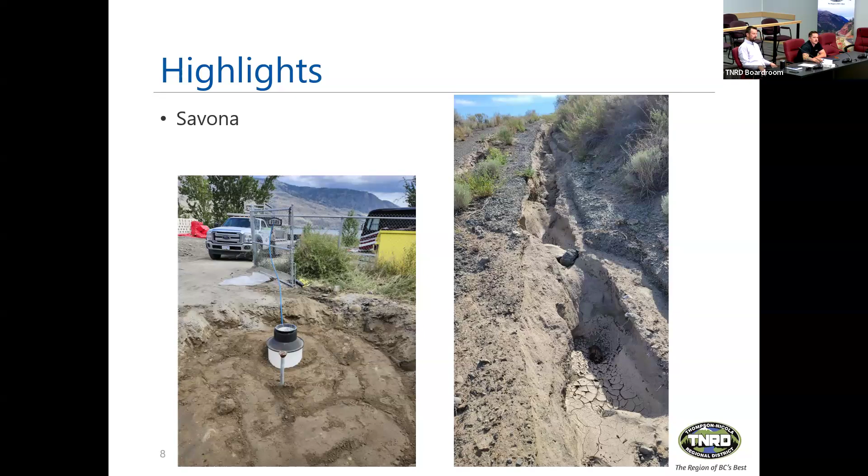Moving on to Loon Lake. Like we talked about, Al's out there, I've met him a few times. We swapped a chlorine pump, a new one off the shelf for him. We talked about reservoir cleaning yesterday - it's kind of a manpower thing right now, maybe get to that down the line.

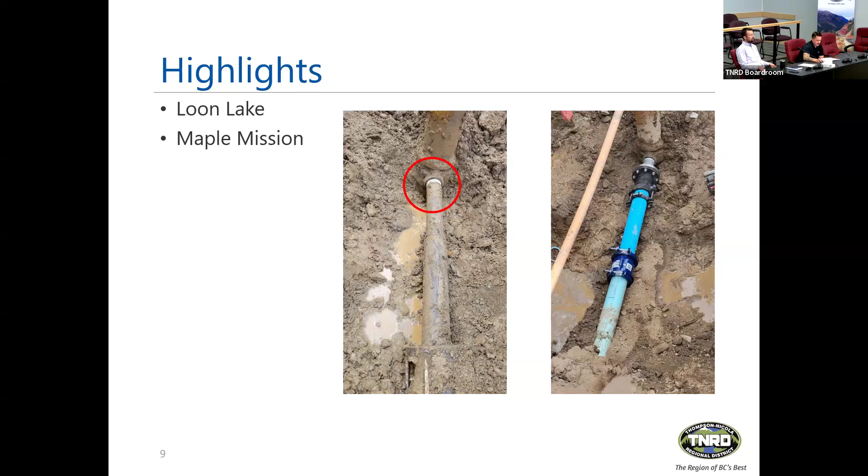Spences Bridge - mid-July we had a bit of an issue. We noticed our reservoir levels were dropping, and overnight the reservoirs weren't recuperating or filling as much as we'd have liked, so we were losing ground. We sent out a water conservation notice to the community to stop watering and save as much water as we could. We went out there, did some door-to-door PR work and handed out flyers letting everybody know what was going on.

That seemed to help - the water levels came back. We found a few more leaks that we had to go around and find, some hoses and some water draining that we had to turn off to help with that.

We managed to pinpoint our issues to the well level sensors at the pump house. We did some switching around of the well level sensors and realized one wasn't reading properly. We got the proper level sensor in there, and a couple days later sent our engineering crew to install new level sensors throughout the system. Everything came back to normal and we managed to take the conservation notice off and just put our regular watering restrictions in place. It was a few days of troubleshooting and figuring things out, but it worked out well.

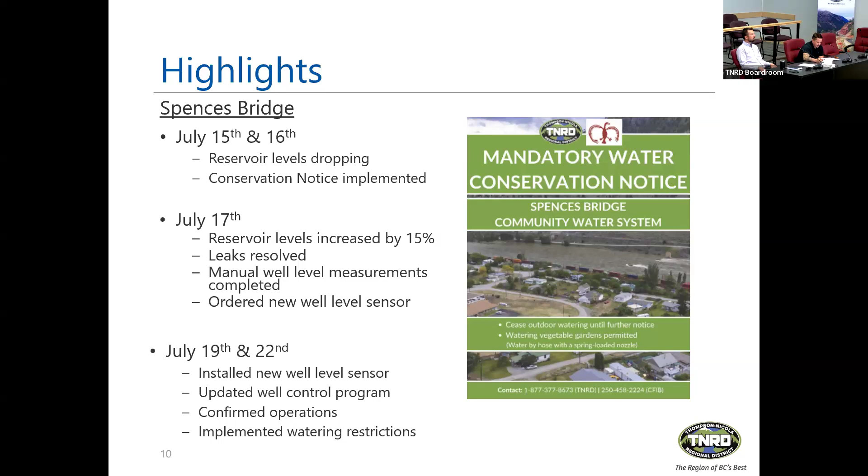Vavenby, Walhachin and Pritchard are all standard - not much going on there. Chlorine pump rebuild in Walhachin, the filters are fine, but nothing really to report for those communities.

Wastewater side of things - Paul Lake is in good order, no issues there. We just finished our sludge pumping campaign for the... septic tanks, sorry.

Weather dependent and resource dependent. There's been lots of power outages up at Paul Lake. They've been doing a lot of power pole work and stuff along the main road. Our generator's been fine - everything's been running normal when any issues like that have occurred.

We had to do a confined space entry. I had to go in there and wrench on some valves and get things moving, and we managed to fix that, but then that caused an issue at the actual treatment plant. So we had to bring a hydrovac truck and try to get some rocks out of some lines, and there seems to be a bit of an issue of rock, dirt and debris getting into that system. But it's running fine now.

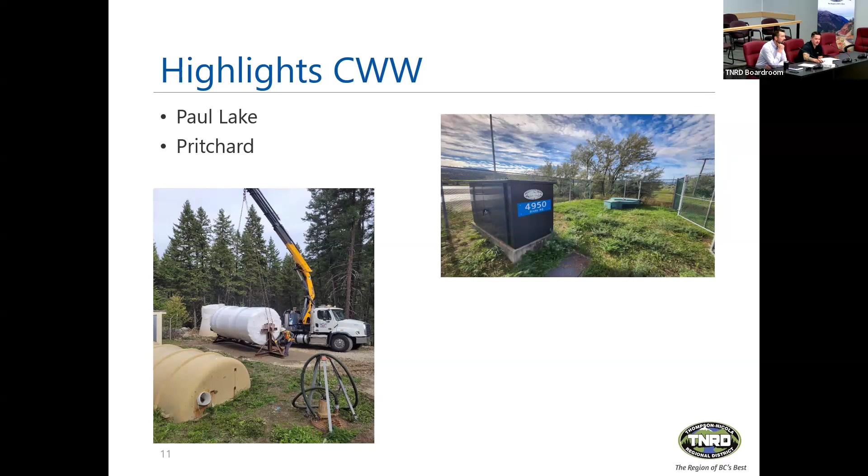General summertime mowing and upkeep throughout Pritchard, and this winter we're going to be doing a UV system cleaning. That's it for now. What's next coming up?

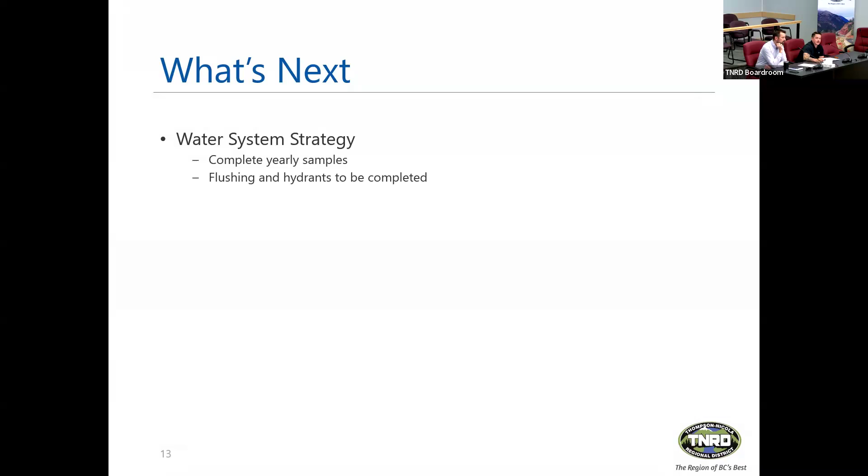We have to complete our yearly samples as normal, just keep that operation going. Hydrant flushing in the falls to kind of clear the lines up. As I mentioned, we have analyzers to install throughout the system, so we're going to have a standard analyzer for everybody. It will be nice.

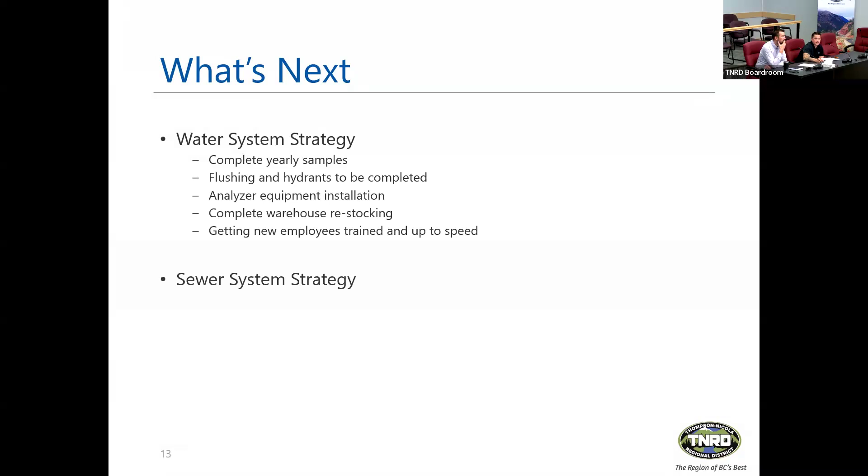Warehouse restocking and just getting our new employees trained and up to speed so we can get that full crew going. Sewer system, want to do a little bit of a clean out. Like I mentioned, there's a lot of rock and debris in that system, so we're going to do a clean of the lift station and some of the lines.

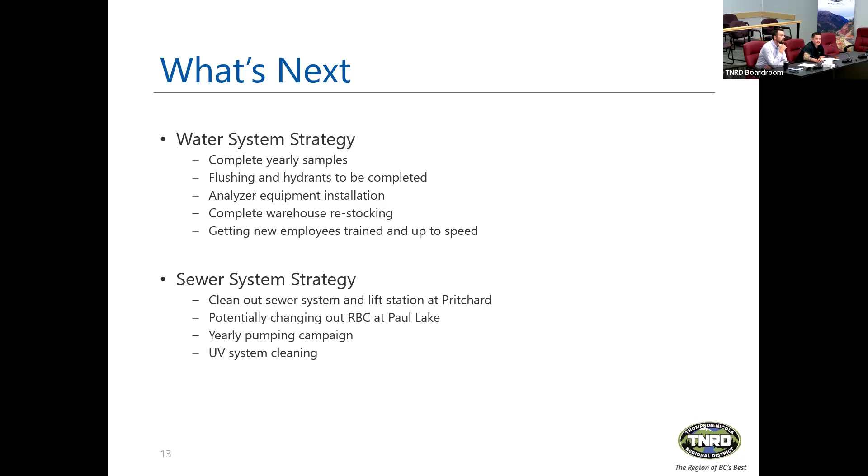Changing out the RBC as we mentioned as well. Yearly pumping campaign is completed, and our UV system cleaning coming up. That's all we got for now. Questions?

Okay, I see a few questions. We have Director Grenier, Sao, and Houghton. So we'll start with Director Grenier.

Thank you, Chair. On the Savona system flood event, my recollection was that there was a fund available to the TNRD to repair things that happened in that flood event. I'm just wondering, when the picture of the road came up and anything else that was going on, whether we've made application to recover some of those costs, if that's something we can apply for.

The Reservoir Road and that work was completed under an EAF through the EOC, the Emergency Operations Center, as well as inspecting the potentially impacted water meter pits. There was also a contractor hired through the EOC to complete all that work as well, so.

I can clarify that. So the answer is yes, that was provincially funded. So it's through, when we do action through the Emergency Operations Center, we submit what's called an EAF, expense authorization form, which means we can do emergency works and then we bill all of that work back to the province under the emergency program. So all those repairs and work happened under that emergency.

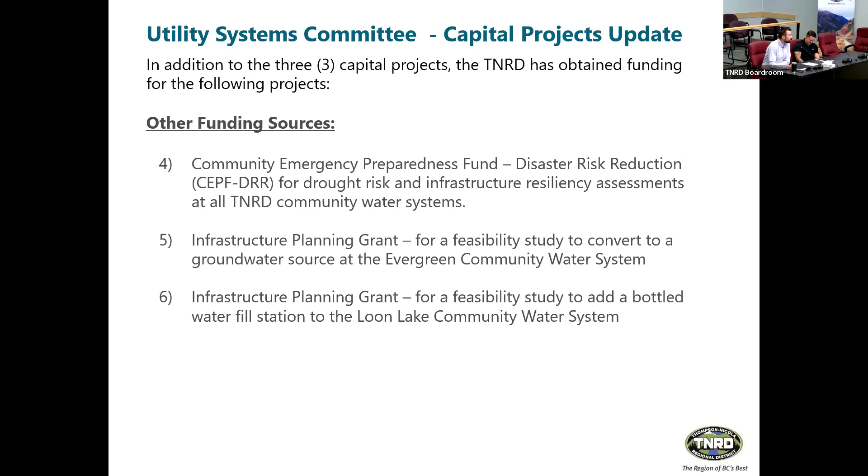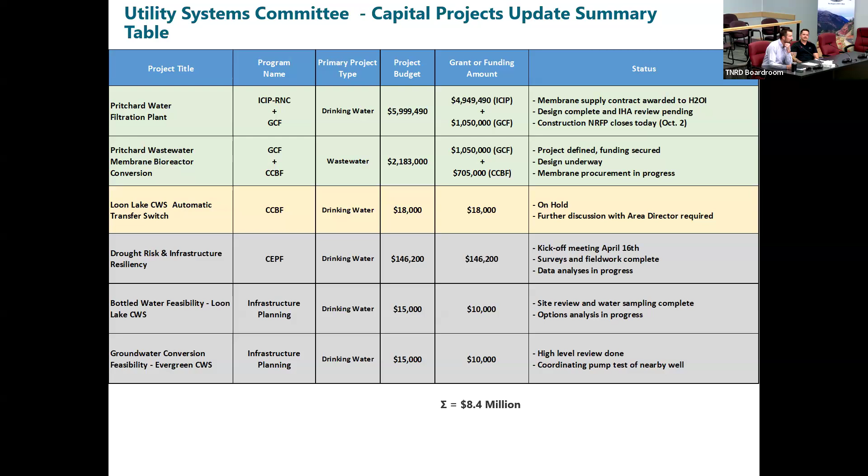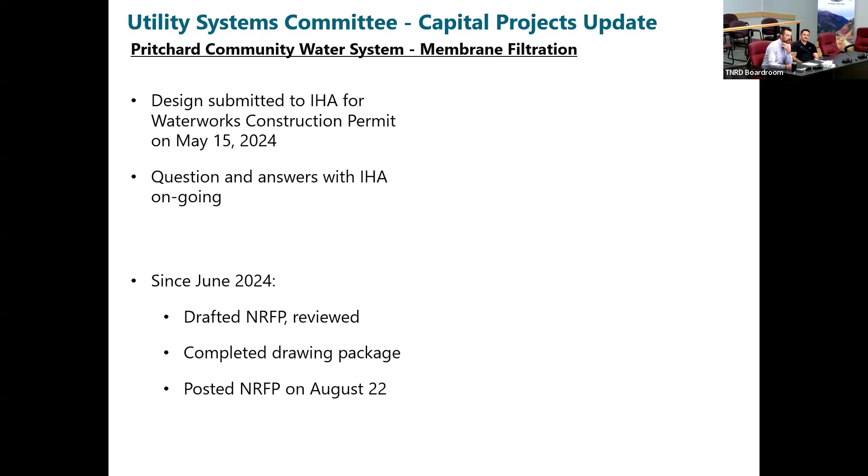Starting off with our membrane filtration plant in Pritchard, design is complete, submitted to IHA for the construction permit, and there's question and answers with IHA ongoing to finalize that construction permit. Since our last meeting in June, we have reviewed the drafted NRFP, or negotiated request for proposal, and the drawing package has been completed along with the NRFP. This is our procurement process, essentially what you'd normally hear as a tender. We're doing a slightly different process, but the tender was posted on August 22nd and closes today, so we'll have some news for you guys next meeting. Fingers crossed, especially from the guy behind me.

Who we'll introduce a little later. Yeah, so this went up on the, yes.

We just have a question from Director Grenier: how many bidders did you have on that project? We do not know yet, it closes today. At the end of day today, it closed at 2 p.m.

How many packages got sent out? I don't know. So for this, the point of contact was True Consulting. They stick-handled the whole process for us. So when I say we drafted the NRFP, I did not draft the NRFP.

I reviewed it, Jamie and I reviewed it, and I did not complete a drawing package. That was our consultant. The consultant posted the NRFP and is dealing with the addenda and answering questions that come in from bidders or potential bidders. They will also provide a recommendation once all the responses come in.

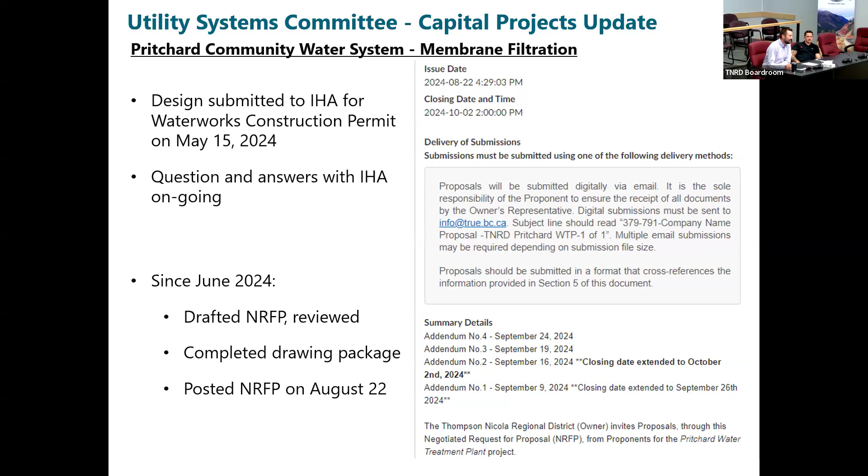So that's kind of where we're at. That's why I say these are not super exciting. It's a big ticket item, but since June, what do we do? We posted a tender and are waiting for it to close. Not super exciting stuff, but it's getting there, one step further along.

Our Pritchard Community Sewer System - again my formatting is odd here, but we have a $2.15 million budget back from July 2023. The design is partially complete. When I say partially, I mean we require our technology selection - which membrane vendor to go with - to finalize the design so our consultant can work that system into it.

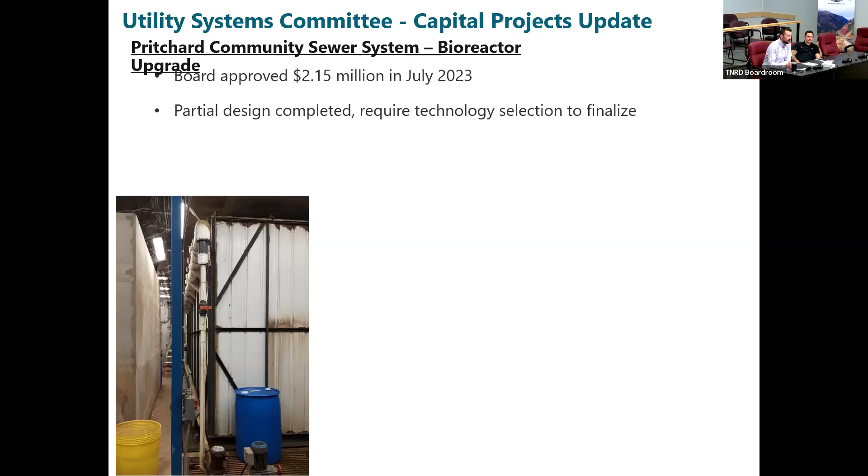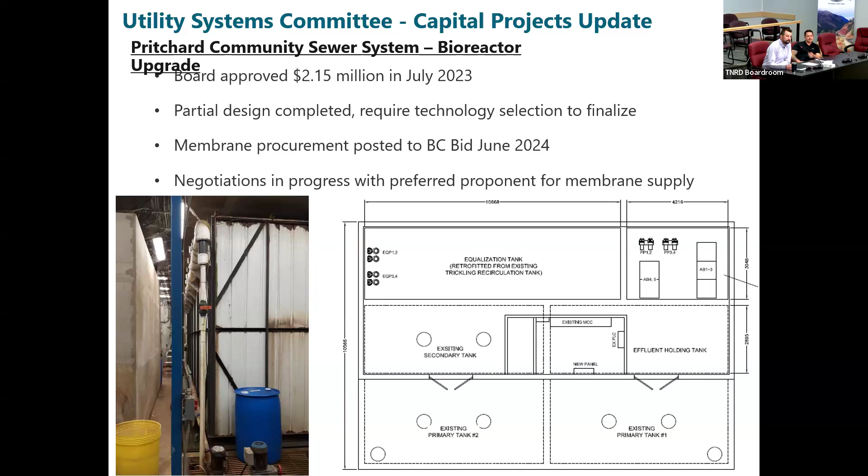Membrane procurement was posted back in June 2024, around the same time as our last meeting. We're currently in negotiations with the preferred proponent for the supply of this. This is again another negotiated piece where we had some responses and narrowed it down to a couple, and are negotiating with the top choice to make sure we check all the boxes. So that's where that one's at.

Loon Lake: the board approved $18,000 in CCBF for an automatic transfer switch in Loon Lake. That was a few months after we had the funding approved for all the other utility systems, which have been completed. So for this one, the timing was terrible - we got into procurement delays through COVID where the transfer switches we purchased for our other utilities were 6 weeks away, but for Loon Lake we were looking at 6 to 18 months, pretty lengthy times.

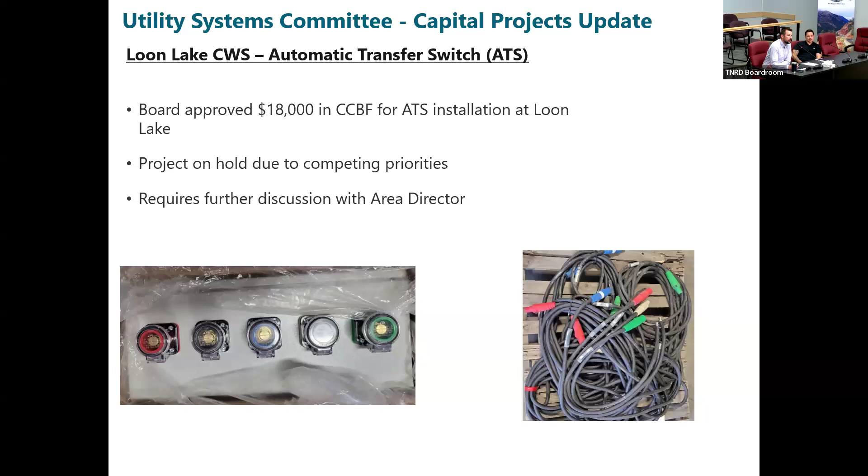In the meantime, we put it on hold and are looking at other options. We have this planning grant now for a bottled water fill station, which I'll talk about in a couple moments. Basically we're thinking this project is on hold and we need further discussions with the area director for this and what we'd like to do up there. So I'm just going to throw that out there for you.

Well, the area director just put it on hold? No, sorry, it's not the area director that put it on hold. Staff's recommending we put it on hold and have further discussions with our area director to see if there's better use of that funding. I have my moments.

All right, we have our CEPF grant - this is our drought resiliency, drought risk and infrastructure resiliency. I don't know who named this stuff, but we're basically looking at the potential impacts of drought on our water system. All the required field work is complete and initial groundwater system analysis has been completed.

The surface water hydrological analysis has been completed and the preliminary results show that basically our earlier snow melts are shifting and resulting in our low water periods shifting, resulting in slightly higher surface water levels. So we're not getting these larger dips - the South Thompson isn't going as low because the snow is melting earlier, so it's pushing that low point back, which is actually at a higher level on the scale, if you can think of it that way.

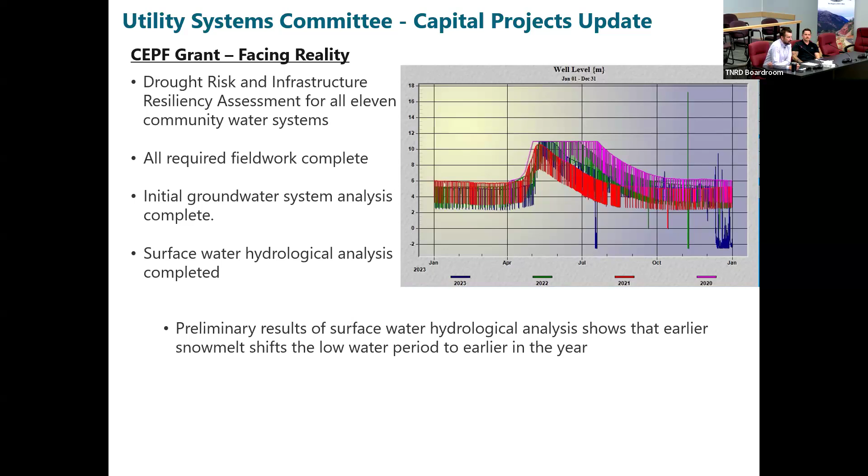So climate change is driving these earlier snow melts, and this is preliminary results right now. We'll have a full report on this a little later.

The next steps are to work with our consultant to review the operational challenges that Quinn, I, and our staff are experiencing, review the summer and fall water levels and the predictions, as well as look at our water licensing. Once they figure out what's going on with our groundwater levels, our supply, and our surface water availability, we need to look at how much water we are using, how much we require, and how much we're licensed for. This is going to look at all the risks we have, and I'm expecting to generate a few more capital projects out of this, identifying some more risks we should probably address.

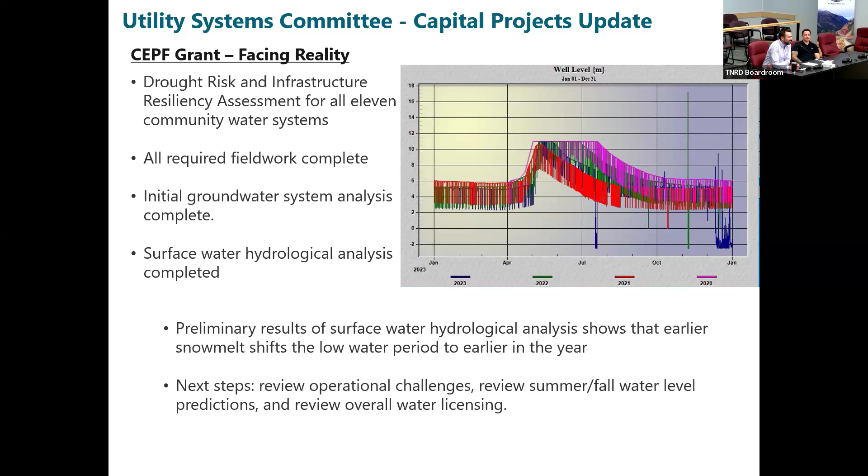Preparing for the future, the planning grants - these were in the future section a few meetings ago. They are in the current section now.

This is Evergreen, our smallest water system with 16 users. We have access issues to our intake. Our intake is on the lower right-hand side of the screen, on the bank of the North Thompson, and has a railway and a highway between it and our community water system, as well as a parcel of private property that's not within our community water system and not connected. So it has some access issues.

So we're looking at converting to groundwater. I had to rotate this map, but in this area here there's a groundwater well. We spoke with another resident who has a parcel over here where there may be potential groundwater. The high-level work's been done, but there's an old valley canyon that runs through here and another one that runs through this area, keeping this piece here. There's groundwater here and potential groundwater here. We're basically at a high level right now of where to predict any groundwater would be.

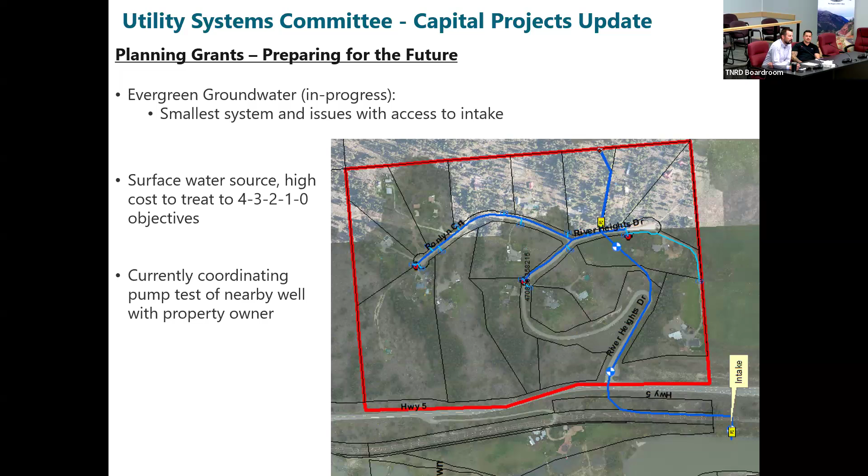Loon Lake Water Filling Station - this is in progress. We completed a site visit up there, took some water samples, and did some analyses on those. Essentially what we found is that we will need dedicated iron and manganese removal, something like a green sand filter to remove the iron and manganese from the water.

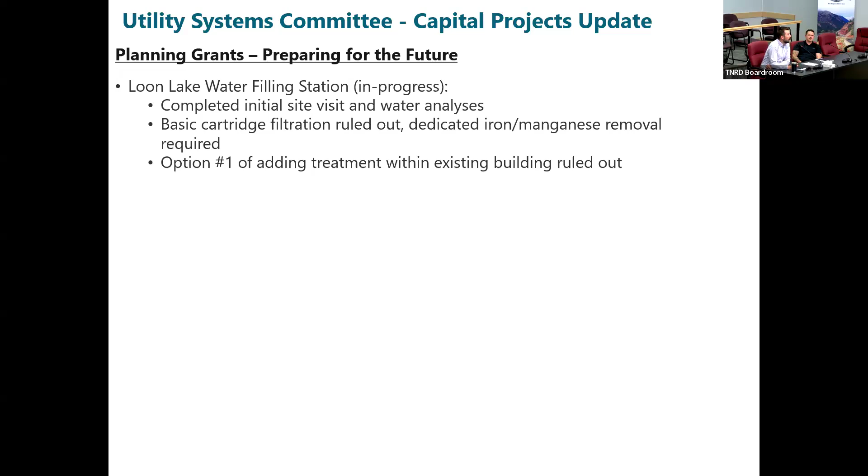It's dissolved with the chlorine that's injected, which doesn't provide enough time to precipitate it before we could deal with it in the existing building. So option one of adding our treatment within the existing building has been ruled out.

This is what our feasibility or planning grant is going to propose: we have our intake in the center here, and that building - we're not going to be able to shoehorn an effective treatment system into it. There's a TNRD parcel here that has 2 water mains along it and is right across the street from our existing intake, where we could potentially put a small building and treatment process for the bottled water fill station, providing some synergies with other departments' potential projects as well.

So that's where the Loon Lake project is at, and this is why we'd also like to put that automatic transfer switch on hold, because a separate building may require different power requirements, possibly 2 hydro services - things like that. We don't want to spend $20,000 or $15,000 on a transfer switch that will be great for 6 months and then obsolete after that, when we haven't in 6 years had to put a generator in Loon Lake to keep the system up and running. So those are the kind of discussions we want to have a little bit later about this.

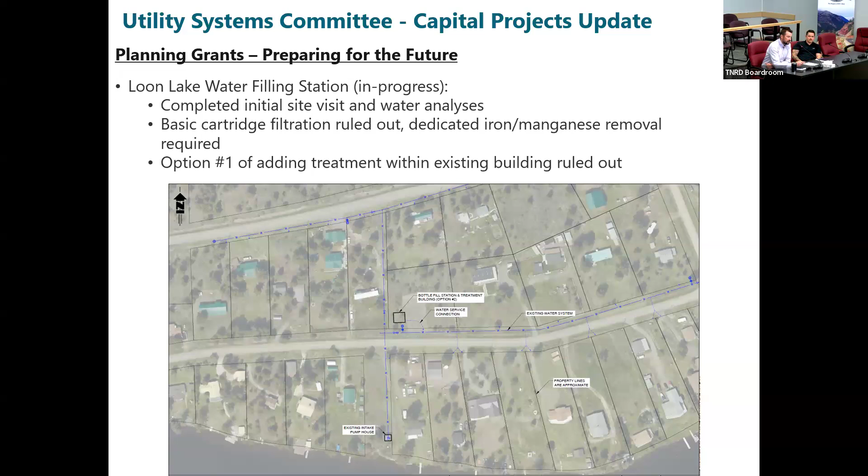So future projects - one right now, there's lots more, but the one on the books right now is the Walhachin Reservoir. We completed an options assessment last year and decided that storing treated water versus raw water will eliminate some hazards.

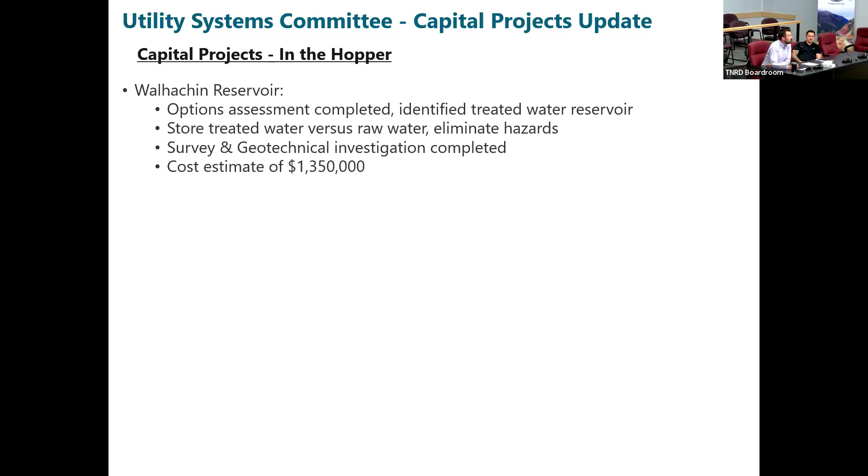We've identified a location for this. This is our current building, where the water comes down from the reservoir and gets treated through this little building here. This site is also TNRD property and has a small garage on it, with 2 parcels here.

So this is a site we've identified, not necessarily right on it, but on this parcel where we've identified to put a reservoir. The water will come from the pump station and current raw water reservoir, get treated through the existing treatment building, and be stored in a treated water reservoir on the parcel adjacent to our treatment building.

Obviously a reservoir at the same grade as the users won't provide the pressure, so there will be a booster skid in there, very similar to the Evergreen booster skid that we have.

Very reliable and will provide adequate water supply and pressure to the community. There's a question from Director Grenier: how many users are on this system? Walhachin has around 40 as well.

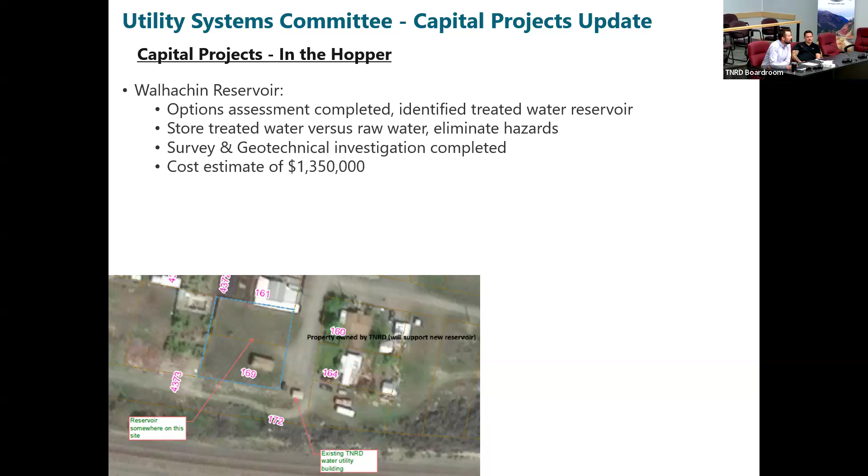So this is what the current area looks like. You can see the fire truck beside the garage, and the two buildings at the end of Barclay Street are the old chlorination building and the newer filtration building. We've done the survey and geotech investigation on that parcel where the fire truck and garage are.

We have a revised cost estimate in our capital plan from the capital budget from last year. We were looking at 1.19 million, but the revised estimate is about 1.35 million to do this reservoir.

To fund this, we would be looking at splitting it 50-50 between the Growing Communities Fund and the Community Works Fund, or Canada Community Building Fund, CCBF. Basically our Growing Communities and gas tax funding there.

We anticipate taking a report to the board, not tomorrow's meeting but the one after, with this funding request. For the Growing Communities Fund, there was a report to the board back in June 2023 laying out just over $5 million provided to the TNRD for the Growing Communities Fund, and staff would identify eligible projects. The Walhachin Reservoir was in that report as one of the potential projects, as well as other departments' projects. So we would be bringing a report for accessing that funding for this.

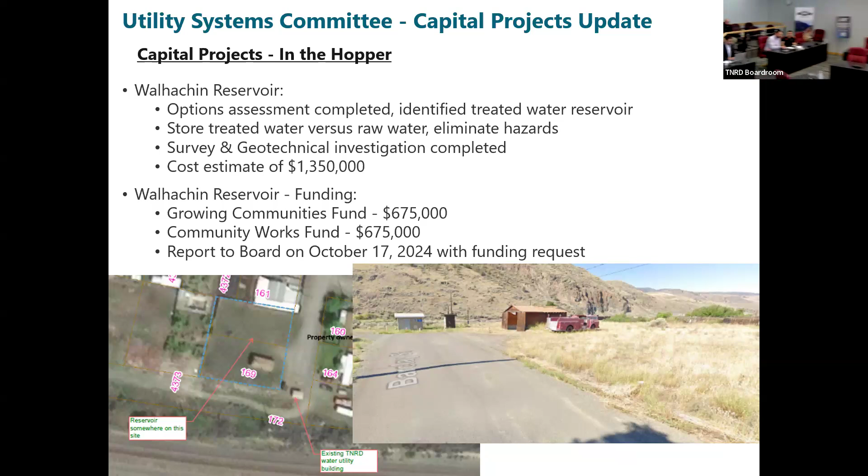I mentioned multiple times the Blue River water main replacement. We have $200,000 funded through reserves, specifically the Blue River Community Water System Reserve, not any other water system reserve or general reserves. So when you see reserve funding mechanism here, it's from that Community Water Systems Reserve, funded by the parcel tax and user fees from that community water system. We also have multiple CWS reserves and CCBF for disinfection and water quality analyzers. Those are the items Quinn mentioned before about standardizing our analyzers throughout our utilities, as well as our dosing, sodium hypochlorite or chlorine dosing pump skids. Those are already funded and in the works.

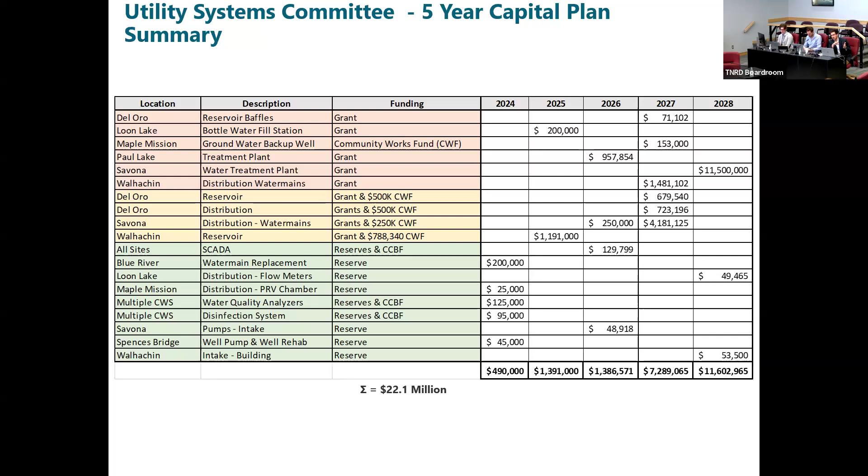Okay, I see Director Sau. Thank you, Chair. To Mr. Vieira, I understand we already discussed this over email, but with the new information you were sharing, I just wanted to see if I have my understanding correctly.

So if these items will have basically a staff time priority, not necessarily funding, but at least they're ratified by the board to say these are priorities. So if I see a system or a project within my area that's not on there, would I be correct in understanding that it's a lesser priority in terms of staff time than, for example, the Vavenby water treatment? Thank you.

So, the Vavenby water treatment facility, the preliminary design is complete. It's a shelf-ready project. It's not on here yet. I think it's further on, we forecasted it further down the road. We put together the 10-year plan and then take the 5-year snapshot. This is just a summary I pulled from the 5 years of the 10-year, so it's like an excerpt of an excerpt. Just for some high-level highlights, but Vavenby would be on there further down the road.

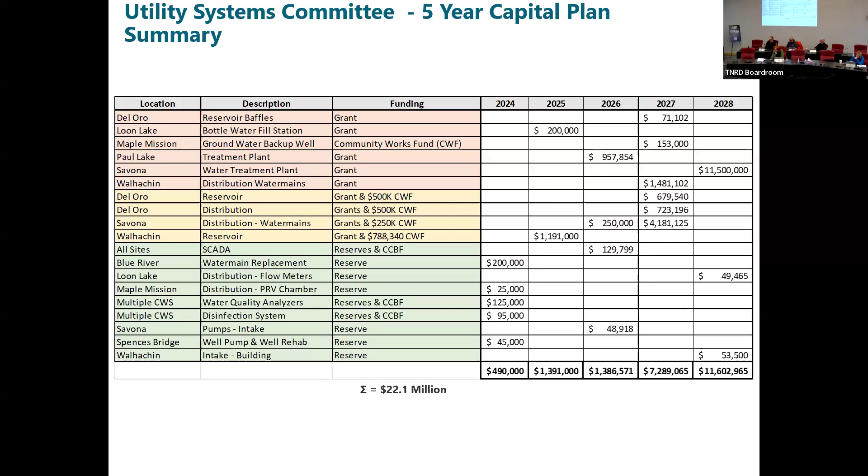That one's identified to be replaced as part of our capital planning and asset renewals. These things are near the end of their life, so let's replace them and rehab that well while we pull the pump out of the hole. That's what the 5-year and 10-year plan had, normal routine asset renewal replacement, not an emergency one. In July, the thought was we could do a short notice rehab on that well if needed since we already had approved funding, but we didn't need to. Okay, thank you, just trying to clarify.

Okay, Tyrone, do you have anything else? That's it, just a blank screen. Okay, so we'll move on to item 5.3, small water system treatment.

All right, thank you, Chair. So we've been kind of foreshadowing the guy sitting behind us, so I'll formally introduce him. Liam, you can join us at the table if you want. This is Liam Baker, our lead engineer with True Consulting, who has been working with us for quite a few years on many of our projects. I've invited him here to give us a refresher on small water system treatment.

We geek out on these meetings talking about all the different water systems and what we're doing for capital upgrades, operational costs, and operational treatments. We're also talking about grant funding for new projects we want to see happen, like the water treatment plant on track here in Pritchard, and many others on our wish list. I want him to talk about what really goes into these projects in terms of planning, budgeting, and engineering, because there's more than just the ticket cost of the guts of a water treatment plant. That's just a small component. We have engineering costs, land acquisitions, all part of the process.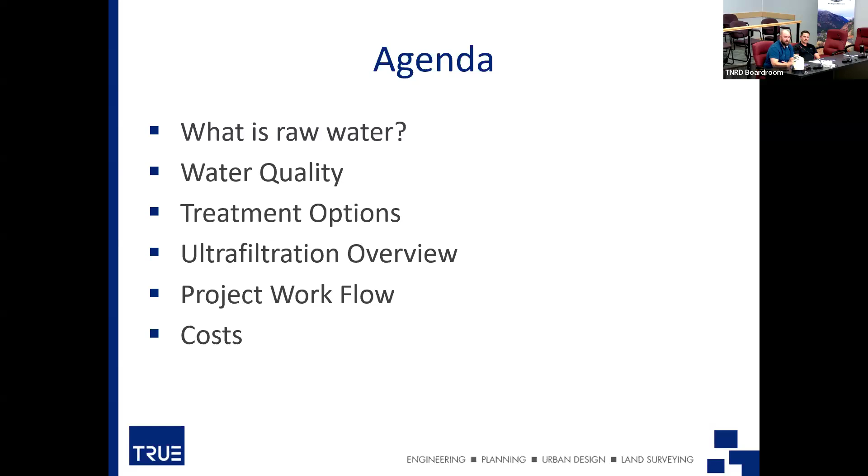And then finally, we'll talk about costs. We struggle with the costs probably just as much as this group might and other municipalities might. It's a difficult battle, and we can talk a little bit about where the costs come from, what parts of the infrastructure result in what kind of costs for the upgrades, and then also some of the inflationary difficulties that we've had in recent times. Obviously happy to answer questions - I've structured it to hold questions till the end, but always happy to have a discussion.

So yeah, raw water, this is usually where you start, right? You're looking at what water is available to any given community. I believe everyone in this room has a water system in their area. Usually you start by trying to find out where there's a quantity of water available - that's raw, untreated water - and then also try to get the best quality of water you can out of either the ground or the surface. That's a good starting point because it can limit some of the costs further down the line.

Withdrawing water from either a well or a surface source requires licensing with the province, and so they provide water licenses for allocations from both those sources. Groundwater wells are typically preferred as a source initially because they can result in cleaner raw water.

Surface waters will tend to have a lot more turbidity in them and be a little bit cloudy. You see the rivers as you drive by them. If you're pulling water out of, in particular, the North Thompson, you end up with some worse raw water quality. Groundwater wells can be either confined or unconfined.

If they're unconfined, it means they can be influenced by contaminants from the surface, so usually we try to shoot for confined ones that are a little bit safer. They can come with their own challenges though, so they'll have contaminants in them like iron and manganese, a typical thing for groundwater that requires removal.

Iron and manganese until recently was only considered an aesthetic thing, so it smells kind of funny when it comes out of the tap, and it will stain your toilets brown and rusty colored if you have prolonged use.

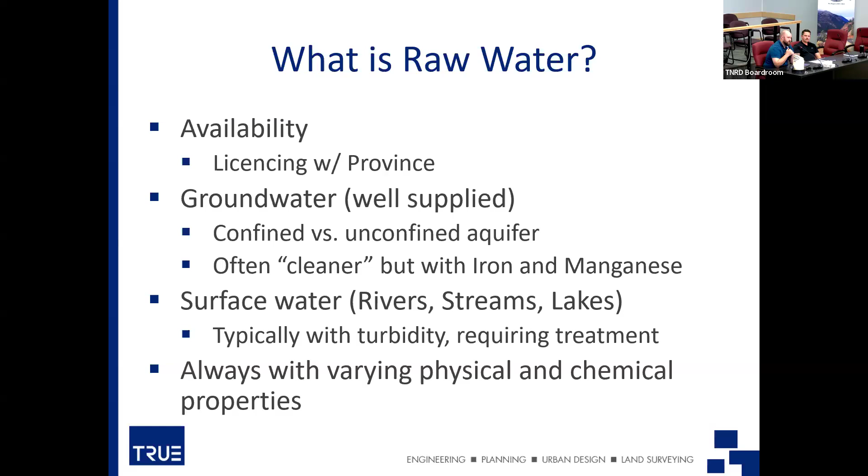Raw water always comes with varying physical and chemical properties, so each raw water source is different and requires a different level of attention or treatment.

One of the main roles that Interior Health has in water systems is regulating construction permits and operating permits for the systems. So when we look at providing water to a community, Interior Health publishes what they call the 4-3-2-1-0 objective - a handy way to remember what you're trying to achieve. The science behind it is basically that you're trying to remove 4 logs, that's 99.99% reduction of viruses, 3 log reduction of Giardia, which is basically beaver fever, and Cryptosporidium protozoa.

Two methods of treatment, so there's some redundancy - if one happens to fail, then you have some backup available. One NTU or lower turbidity, which is the cloudiness, some of the suspended solids in the water. The reason you're trying to lower that to 1 NTU or less is because that is where bacteria and viruses tend to attach themselves, so they'll hang on to their turbidity. If you have high turbidity, there's a higher likelihood of having contaminants in the water.

And then zero detectable E. coli and fecal coliforms. Everyone knows about E. coli after Walkerton, I guess 20 some odd years ago now, but certainly not what you want in your water system.

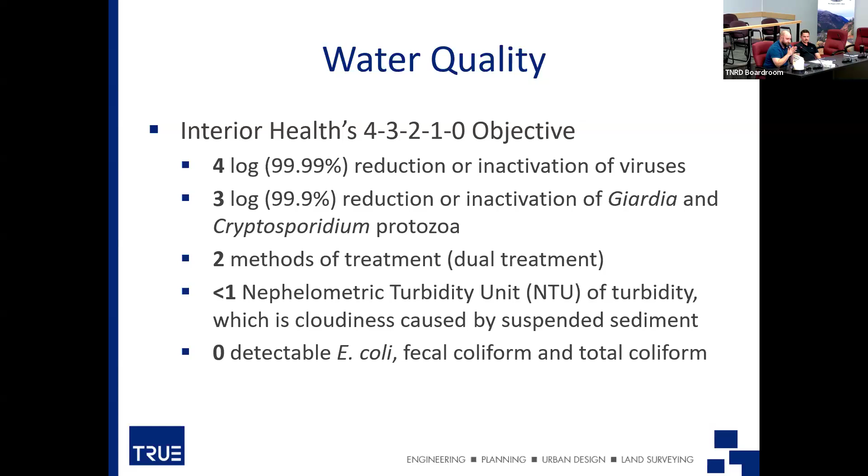The other guiding document out there that we reference often with water quality is the Canadian guidelines for Canadian drinking water quality. It's a very exhaustive list of all the potential contaminants, everything from arsenic, lead, the bacteriological or microbiological components like E. coli or fecal coliforms. It basically outlines what your aesthetic objective would be for every potential component of the water, as well as if there's any maximum allowable concentrations that are safe for human consumption.

There's also radiological ones as well. They're often not as focused around here, but we could go through it in exhaustive detail - there's about 200 items on that list, so we might skip that.

So really the goal is to try to filter or clean up that raw water to the point where it's safe for human consumption via those two guidelines that exist. There are several different technologies that are around, everything from simple and cheap to complex and expensive. They all have different benefits and drawbacks.

The simplest one that we often see around here are things like cartridge filtration, which you have in Walhachin and I believe a couple other places. They're better for really small scale systems, so very small systems under, say, 50 residences. And they filter the water down to about a 1 micron size, so 1 micron is one thousandth of a millimeter.

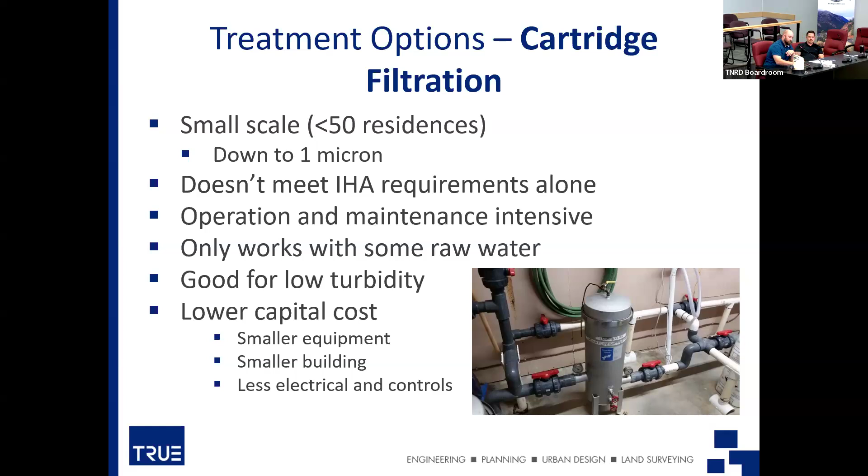So that's on the simpler side of what kind of treatment we might see. I call this one conventional, but it can also be like mixed media filtration, where you basically have vessels with different media in it. Usually it's sand or anthracite or granular activated carbon that basically filters the water in the same way that a membrane filtration plant might, but it existed as a technology much before membrane filtration. So it was often used, you know, it's still used, but it was often used even more so up until 2005, 2010, that kind of timeline, because it was the technology that was available, and it's generally affordable.

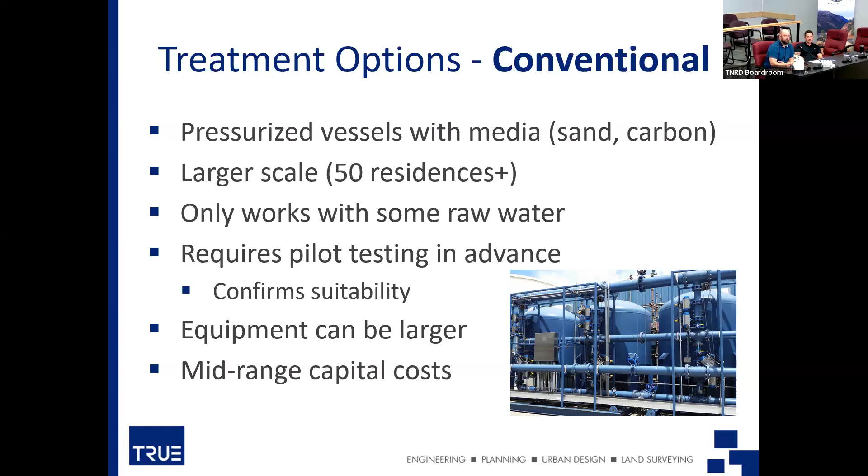It does take up quite a bit larger space, and it can be generally fairly expensive. It does also have operational challenges. It requires a bit of front end work to do some pilot testing to make sure the type of media you'd like to use will actually do the job. And it requires backwashing in the same way that a membrane filtration plant might. It's generally used for larger scale systems, 50+ residences kind of thing, all the way up to hundreds of thousands of residences. The one we'll talk about a little bit more today is membrane filtration.

And the reason this has become more common is that, well, several reasons, but the costs of those systems have decreased a lot in the last 10, 15 years. Basically, these are hollow fiber membranes that have very tiny pores along the side of it, down to 0.02, 0.05 microns. So small enough that you can get water through it, but you filter out virtually all the contaminants.

So water will flow basically from the outside of those tubes into the tubes and then down the middle of them, and that's how the filtration mechanism works. So all the contaminants, the solids and everything, are held on the outside of that tube. And then when you backwash it, you basically push water through it backwards to blow out all the solids and clean the filter.

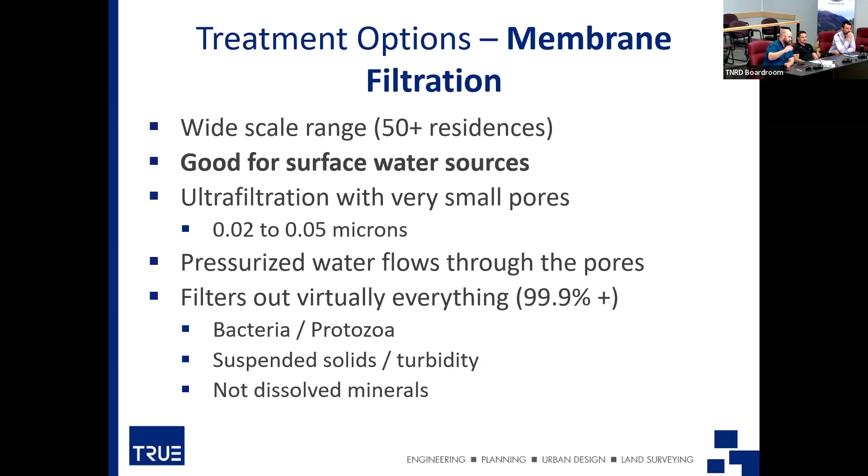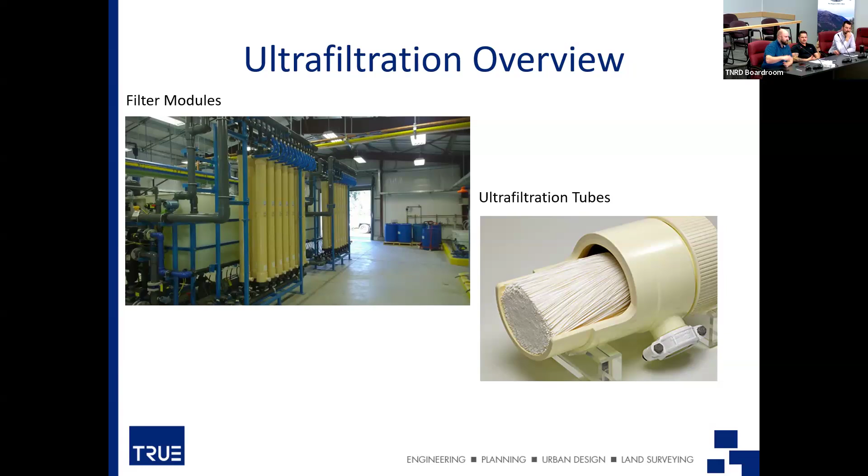We've already talked a bit about this. The filtration mechanism does require backwashing, so up to about 5% of the water we call reject water. I think the city of Kamloops has their backwash very low by now, less than 1% last time I talked to them. Just through experience, you can reduce the amount of backwashing required. You learn how to operate your plant and optimize it, and it can be very efficient. You do need to periodically clean the membrane filtration system with chemicals, and the filters can last 12 to 15 years, depending on raw water quality and how it's operated. City of Kamloops, I think we're in that range, maybe even a little longer. They've got really good success with their filters there.

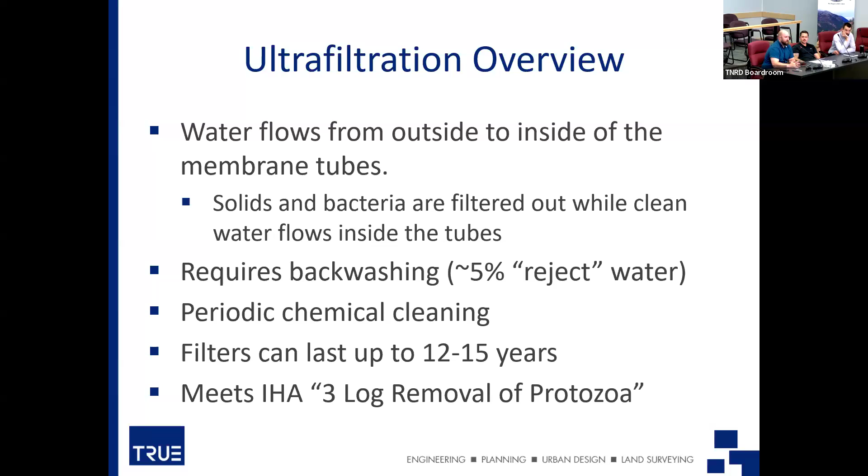And it meets IHA's 3 log removal rule, so it basically contributes to all of IHA's 4-3-2-1-0 guidelines. It doesn't meet the 4 log removal of viruses, but that's typically why you might need things like chlorination or UV.

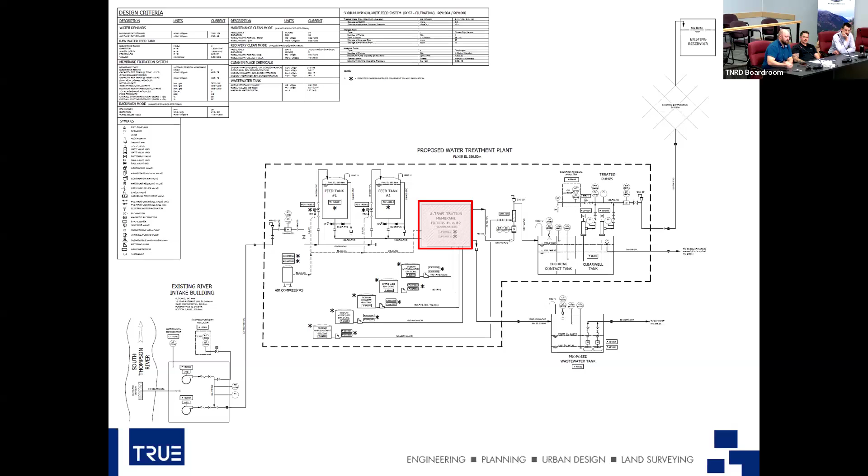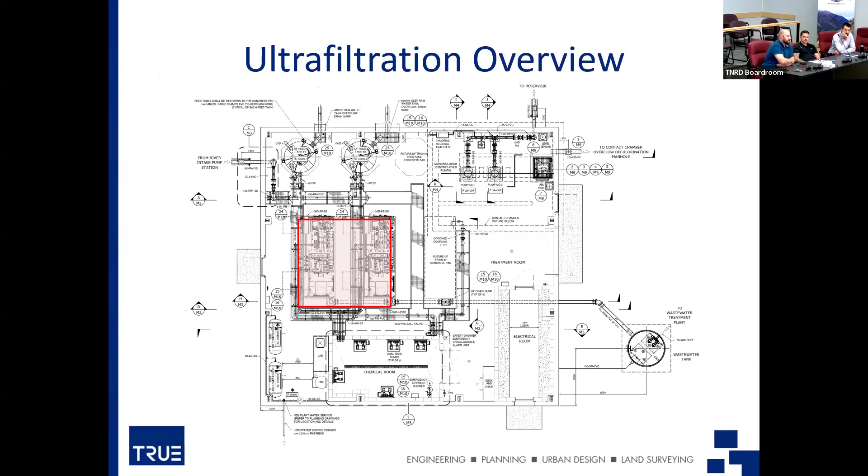Some of the ancillary treatment options we often see: if you have high iron and manganese, you might need a specific filter like a greensand filter to remove that. There's also sometimes activated carbon or otherwise that can help remove color you might see in water. Coagulation is something we sometimes put upstream of filtration, where you add chemicals to the raw water so that instead of very fine particles, it binds all the fine particles together into larger particles, making it easier to filter out. Sometimes you need it, sometimes you don't.

Chlorination and ultraviolet treatment are mechanisms you see fairly regularly because they allow you to meet the second treatment barrier of that IHA 4-3-2-1-0. The filters will be the first barrier, the first treatment methodology, and then the chlorine or UV will be the second. Chlorination is very common because we also usually want a residual chlorine level in your system to make sure if anything ever gets into your system, there's a little bit of chlorine in there to sterilize and clean up that water.

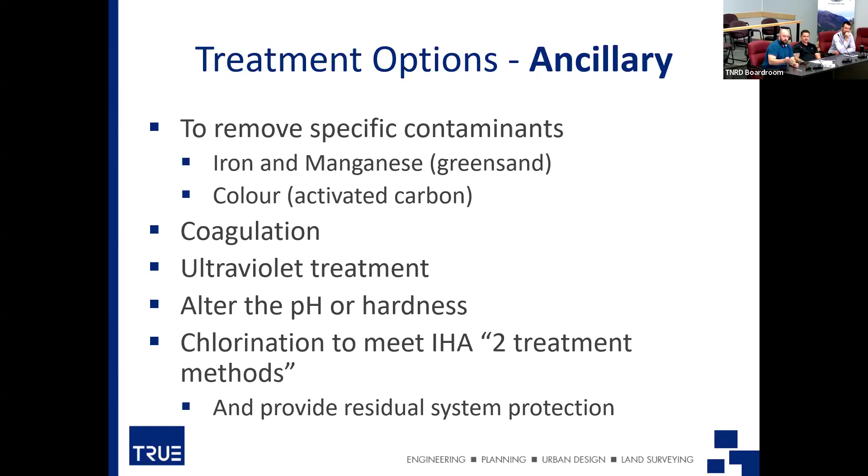So we've talked a little bit about it, and I think Mr. McCabe alluded to the amount of time that we've been working on that Pritchard system. A typical workflow for this type of thing can last up to 5 years, depending on the complexity.

The first step is usually identifying that need. The TNRD has done that already for all the water systems by virtue of doing a water system master plan, so every water system in the TNRD has a fairly recent one. A lot of those master plans will basically say you might need to treat your water, but you might want to actually go try to drill a well or something to that effect. So usually those master plans are used to set the stage and identify the needs of the system over the 10, 20, 30-year period.

After that need is identified, it will typically undertake some preliminary design and pilot testing. We'll look at the raw water quality, we'll look at the flows necessary going through the plant, and come up with a preliminary budget and cost to build a certain type of plant. Usually that's when we'll select the treatment technology. In a lot of cases these days, it is membrane technology because of the lowering of that cost a little bit and the ease of operation and maintenance.

For a year afterwards, year 2 to 3, we would typically do detailed design. So designing the plant, working with our sub-consultants to do building designs, electrical designs, civil and engineering designs, and the plant itself. And then once that's complete, we typically have to apply for an IHA construction permit.

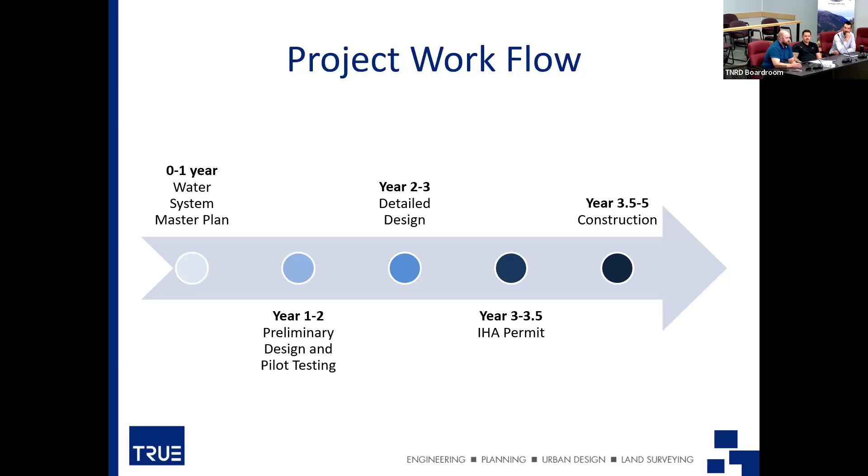Most equipment manufacturers have sort of stock-size skids that they produce, and so there is a minimum size that makes sense to build a membrane filtration plant on. But that comes with a minimum cost, and these days that seems to be around the $1.5 to $2 million range.

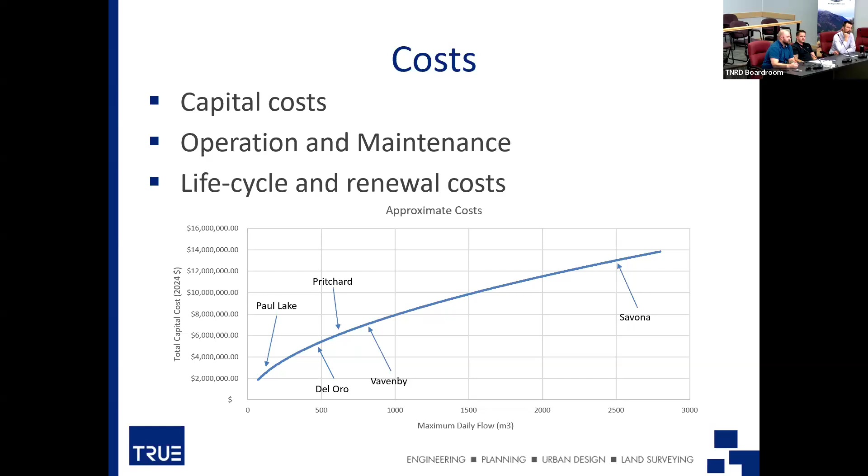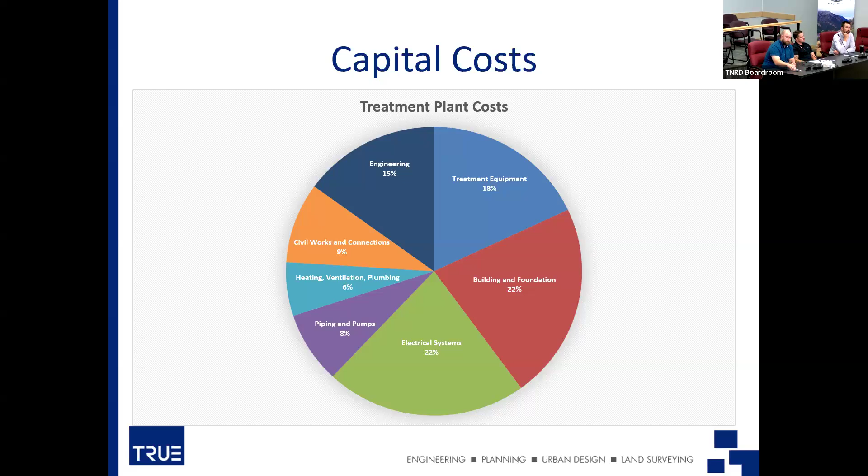And that's all I have. That's a fair amount of info, reasonably technical, but hopefully not too technical. I'll answer any questions and could sit here for hours if you'd like.

Thank you very much for that offer of sitting here for hours, but I think we will decline. So I have Director Grenier, Director Sau, Director Houghton. Okay, thank you Chair, thank you for the presentation. I have a couple questions.

The first is about your raw water starting turbidity - what's your target for raw water? The target treated water is always under 1 NTU. For raw water before treatment, it tends to vary, and that varies over the course of the year too. In the South Thompson River, it can vary between say 4 and 20, but we often design these systems to accommodate extreme peaks. If there's a landslide upstream or something that washes turbidity into the river, you can have turbidity upwards of 100, 200 NTU. So a lot of the time we'll spec filter systems that can handle that turbidity load for a short period of time. You wouldn't want to run a plant that way continuously - you'd run the filters into the ground a bit. Plus at some point a filtration system requires so much backwashing to push solids back that you start to lose more than 5% - you start to lose the value of the production of that water. But it totally varies based on the source. The Thompson rivers can vary between 2, 3 NTU upwards of 20 regularly.